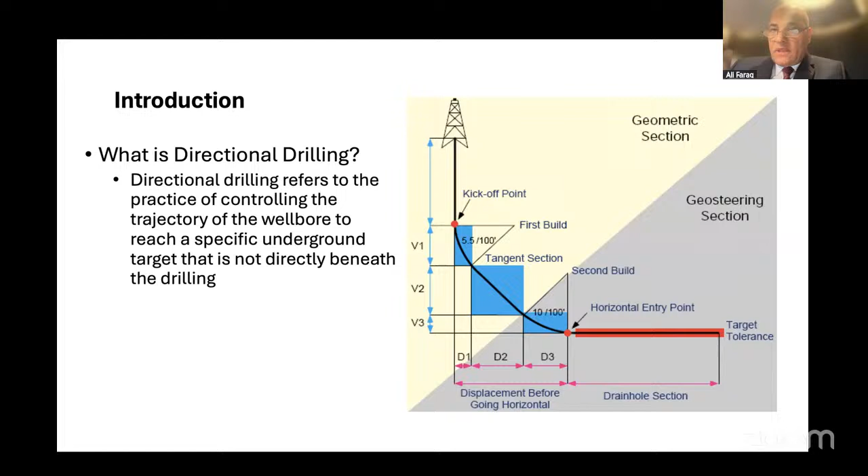If you look at that small schematic, we have the rig. I need to run... Okay, what we have here, we have the rig and then the kickoff point. At the kickoff point, we're supposed to deviate the well. As we deviate the well, we build the inclination at 5.5 degrees per 100 foot. The idea itself... okay, what doesn't work. Give me a second to use my pen.

What we have here is the kickoff point. That point depends on the radius. All the curve sections mainly depend on the radius of curvature. So if we have a circle, in the circle we have a radius, and within that radius we have an arc, and we have theta. So the arc equals theta multiplied by the radius.

So that value is in radians. But on the rig side, we use inclination or angle, not radians, because the driller will not understand that. So what we do is take 180 divided by pi, which is 3.14, and this will give us almost something like 57.29.

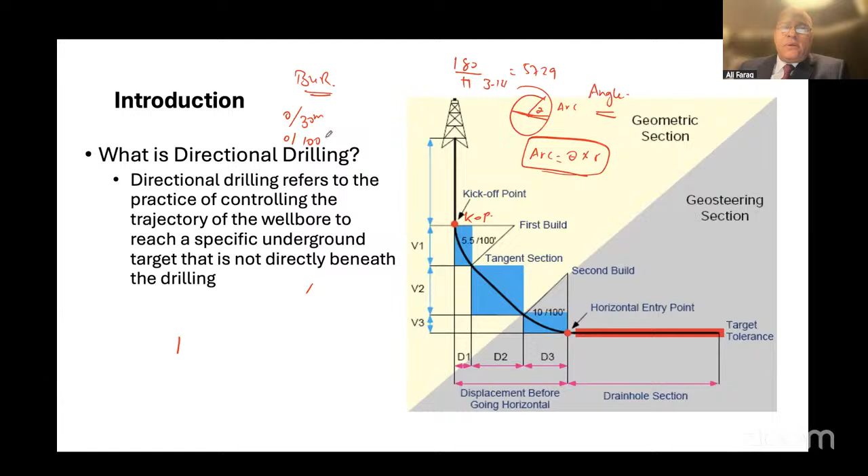So the build-up rate is supposed to be either degree per 30 meters or degree per 100 feet. So if we set the build-up rate equal to that number, 57.29 multiplied by 100 feet, it will give that number divided by R. Sometimes your client gives you the build-up rate and asks you to build the trajectory based on it, whether it's 3 degrees, 2 degrees, or 2.5 degrees per 100 feet. So we use that to get a radius of curvature.

So if we have this as the radius of curvature, we build the angle doing a curve section, and then we do the tangent based on the build-up rate we got from our client. To build that trajectory, first you need the first build-up rate, then the tangent from that point to this point - that's the tangent - and then the second build-up rate, which is 10 degrees per 100 feet. We'll come back to building the trajectory in detail later in our course.

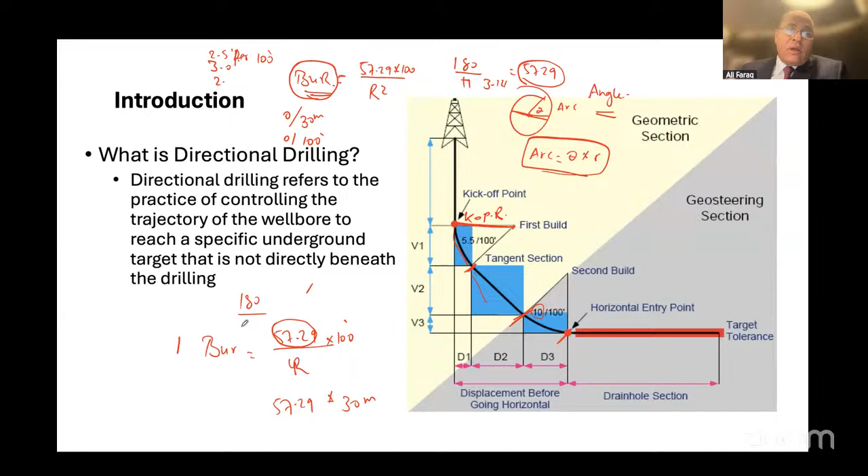But right now you're supposed to know what the build-up rate is. The build-up rate equals 5729 divided by the radius, multiplied by 100 if using feet. If you're using meters, that number 5729 is multiplied by 30 meters - that's the build-up rate per 30 meters. Where did that number come from? That's the conversion from radian to inclination or angle, which is 180 divided by pi. That's as simple as that.

Objectives of directional drilling - why we are doing directional drilling. First, sidetracking. What sidetracking is: we are building the well while we are drilling. We get an obstruction, we get stuck pipe, whatever we get, and then when pulling out of hole you cannot go further. So you do a fishing, then put cement and do a sidetrack. So you get a deviation from the original hole, which is a vertical well, to a deviated hole, and then you can come back again to your target. This is number one of the objectives for directional drilling.

Number two, why we do directional drilling: we are controlling the fault. Why are we controlling the fault? If you have a fault like that, we know that if you drill straight through the fault zone, you will get a lot of trouble due to losses and stress in that area. Then you will lose mud or get stuck.

So for that reason, we sometimes drill just crossing the fault using directional drilling. This is number two. Number three, inaccessible area. If you have a village, you cannot destroy the village to drill for that target. You stay here and do directional drilling instead. This is the inaccessible area case - or if you have rivers, mountains, or similar natural obstacles, where you can't access the target straight from top to bottom, you do directional drilling.

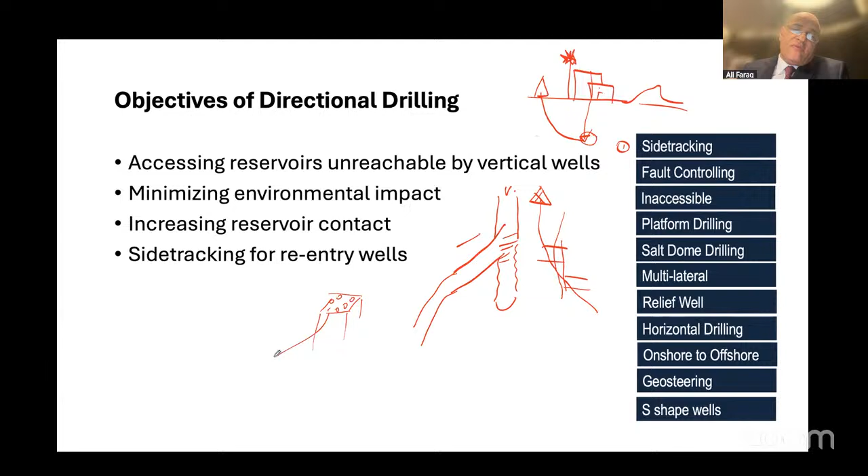Platform drilling - in offshore drilling, we have only one platform with many slots, and based on those slots you go for the first well, second well, third well. That's one platform - that's what we call platform drilling offshore.

Salt dome deformation, or salt dome drilling. The salt comes up and forms a diapir like that. When the salt comes and forms a diapir like that, we have three stress regimes. The first one is strike-slip. From that, we have reverse fault here, and normal fault there.

Due to changes between sigma 1, sigma 2, and sigma 3 - which is sigma V and sigma H capital or sigma H small, or principal stresses - you cannot drill straightforward easily in that stress area. Or if you go through the salt, it contains a lot of temperature.

So what we did is stay here and drill from far away as directional drilling. So for a multilateral well, we stay there and have one target, and we drill the target like that. And if we have another target, we make a fishbone well, which goes from here to there and from here to there.

I will take a moment to explain what the relief well is.

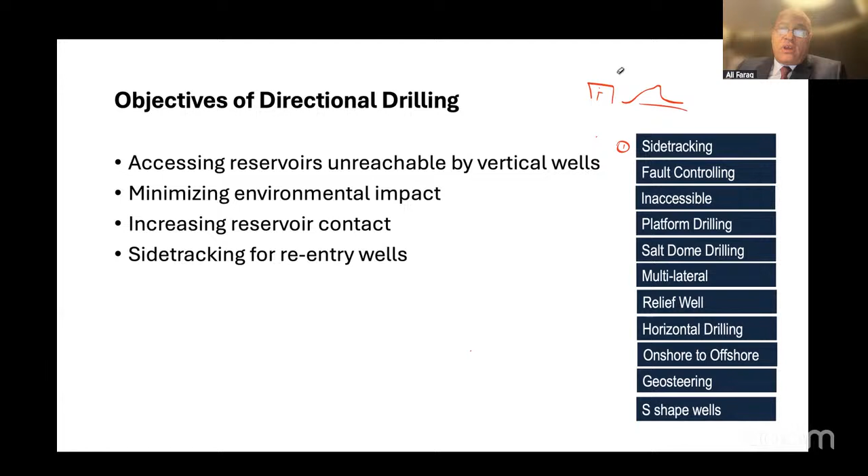If we have a catastrophic problem, like what happened in Syria long before, in 1998, there was a blowout, and a lot of hydrocarbon came to the surface, and they could not control the well. The well started burning, so what we do is something we call a relief well.

We stay far away from this location and drill a well to kill what we need to kill. We have a reservoir at that point, and a well that caught fire due to the catastrophe. So we stay at that point and do a relief well - maybe more than one, 2 or 3 - to kill the well and control it. That's why we call it a relief well.

For horizontal drilling, if you have a thin bed, you can go for horizontal drilling easily in each direction.

Onshore and offshore drilling - sometimes, like in Egypt or Aberdeen, there is an island very close to the shoreline. We put an island, we put a land rig here, and we can drill inside the sea, inside the ocean, or inside onshore or offshore areas. Why? Because a land rig is very cheap compared to an offshore rig.

For geosteering, sometimes we have a very thin bed, so we go as far as we can using a geosteering technique.

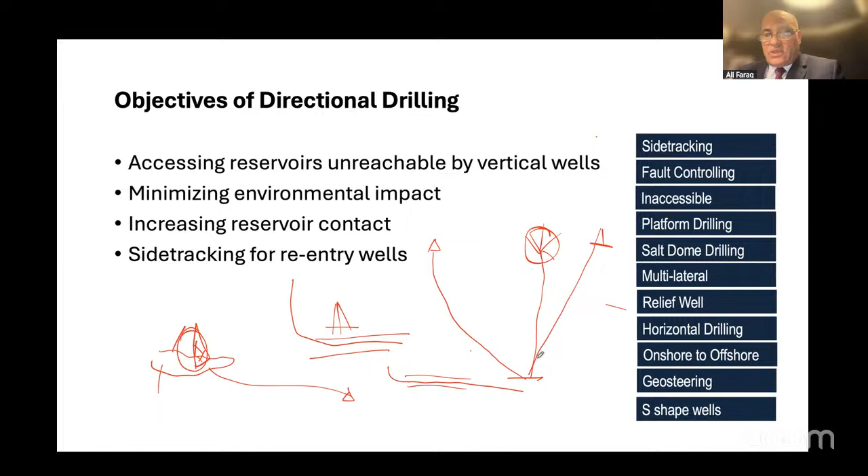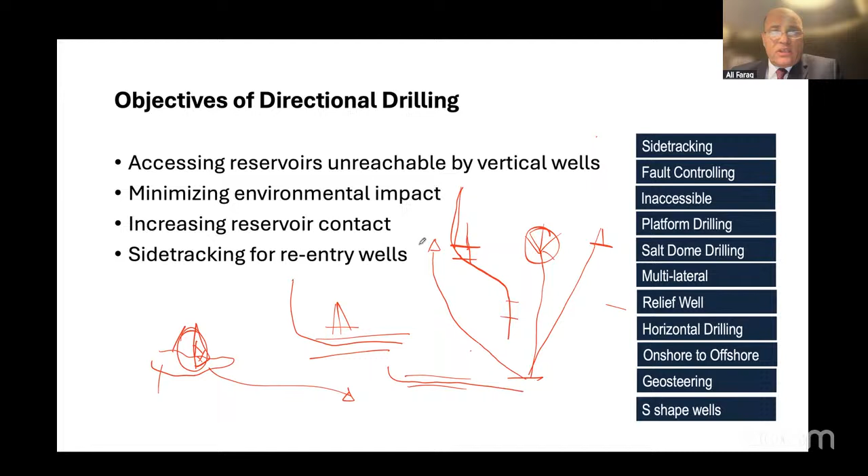An S-shape well is used if we have 2 wells, or sorry, 2 targets. We build inclination, come from here to there, build inclination, hold inclination, and then drop - that's what we call S-shape drilling. So there are really a lot of objectives related to directional drilling.

Directional drilling started in the 1930s. The first attempts were done because they needed sidetracking, and after that to control the lease - we're drilling at that point and cannot go out from the boundary of our lease. So they did directional drilling to correct the well, as a correction run.

They used an acid bottle as a surveying method. This was a very basic tool - we have acid in a bottle like that and drop it in the well. When you drop it in the well, the acid takes the verticality, so we can know what the inclination of the well is.

From 1970 to '78 arose the measurement while drilling tool, MWD - that's almost 50 years ago. Before that, we used a single shot, using a Totco ring or Totco on acid bottles.

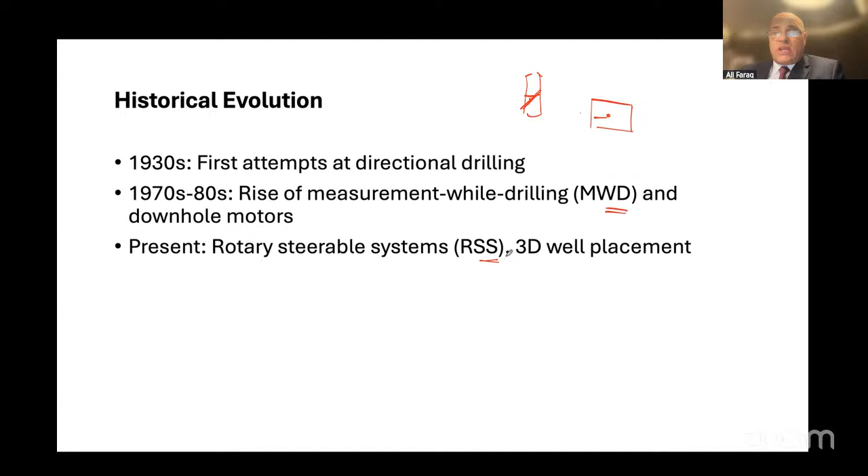Present day, we have RSS, rotary steerable system, to do 3D well placement. That's mostly replacing the motor in most cases, and it helps us avoid key seats and high dog leg and tortuosity. Tortuosity is the summation of dog leg from 0 to TD - that's what we call unwanted dog leg. So the RSS helps us control the dog leg and tortuosity.

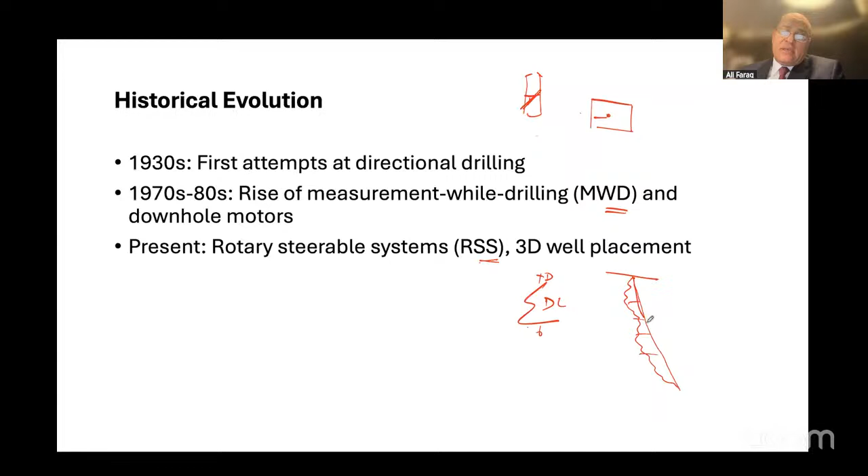How does this come about? If we do a summation for dog leg like that, and we have a calculated or actual dog leg coming like that, that's an unwanted dog leg - we don't need this unwanted dog leg. The rotary steerable system helps us achieve a very smooth wellbore trajectory.

Types of directional drilling - we have 3 types, by the way, and I would like to mention them. The first one we call J-shape. I will come back to that one based on the radius of curvature. And we have S-shape, and we have double build, which is horizontal.

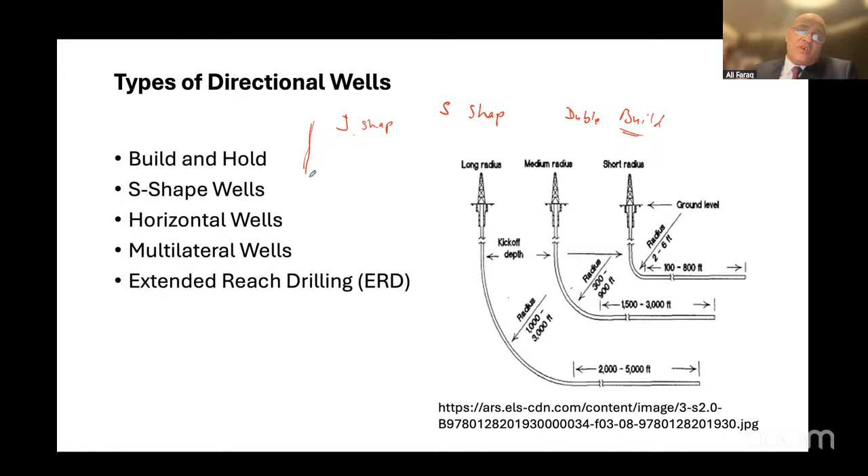We have 2 types of J-shape. Why? Because there is a relationship between the radius of curvature and the target distance. When the radius, which is R, is bigger than the target distance, this is one type, and when R is less than the target distance, this is another type - 2 types. How does this come about?

If you have a rig here, a kickoff point, your radius, then go down to TD, and you have a target distance - this is part of the angle, and this is your curve, and this is your tangent. This is the shape of the well - that's what we call J-shape.

The other one is when the radius itself is bigger than the distance, so the radius of curvature is very, very big. Let me erase this to keep it clean for you guys. Okay, here we are.

When the radius from the kickoff point is bigger than the distance, that one is very big, so I will do the tangent. So it will be: kickoff point, curve section, and then tangent. That one's build-up rate is very, very small.

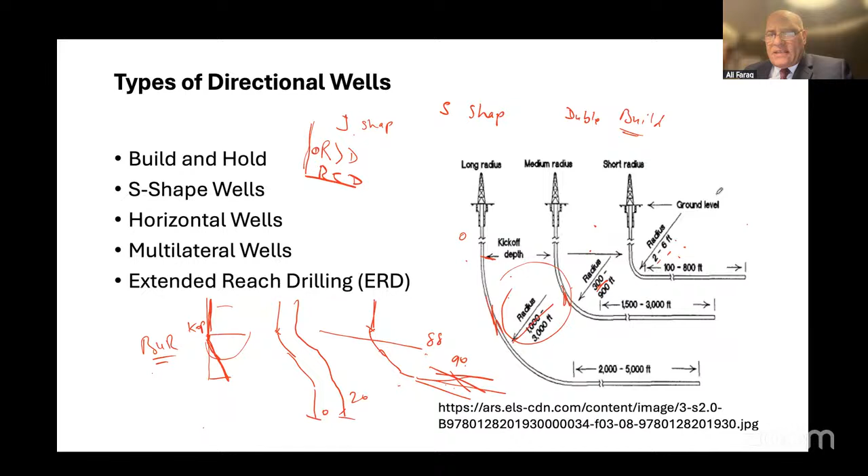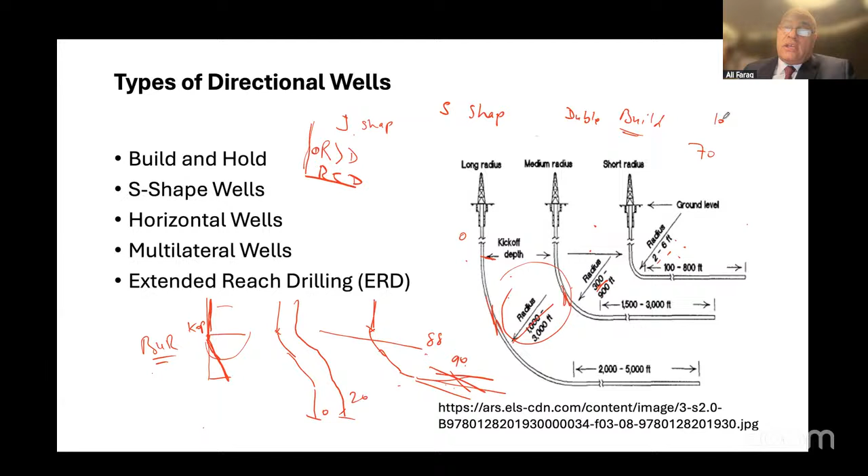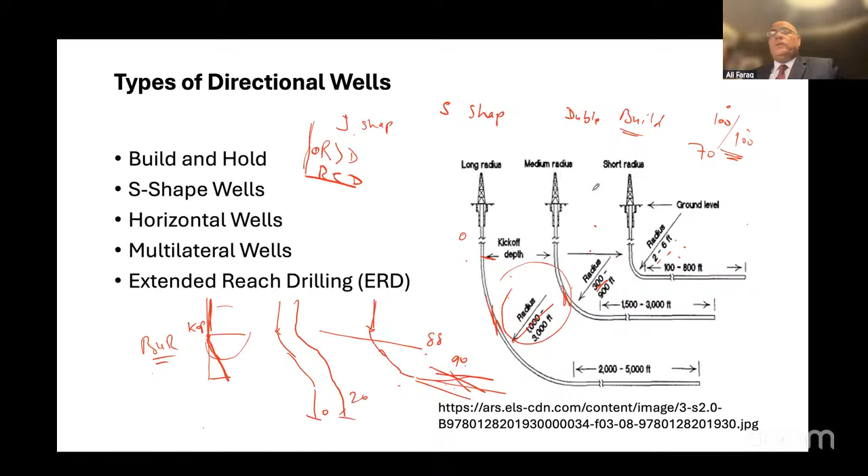When the radius is more than 1,000, we call it long radius. When the radius is 300 feet, we call it medium radius. When it's from 2 to 6 feet, we call it a short radius well. And there's some ultra short radius well when the inclination comes to 70 or 75, or sometimes 100 degrees per 100 foot. I drilled one well like that in Qatar - it's a very ultra short radius well.

I did all the directional work in a few hours in one drill. So what I'd like for planning is, if you already have a trajectory and you decided your trajectory is short, long, or medium radius based on the build-up rate.

Okay, then what is the target? We have three targets based on the person. The original geological target is very big, as you see the green one. We do some uncertainty reduction for geo uncertainty, based on the geologist. Then we reduce it further for drilling uncertainty, to keep yourself in that red area - we call that the drilling uncertainty.

So for the drilling uncertainty, you need to build your well plan based on subsurface and surface location, subsurface location coordinates X and Y, true vertical depth, measured depth, and then after that you need to build your trajectory - build hold, build drop, J shape, S shape, and so on.

And then you need to think about anti-collision. What is anti-collision? The distance between one well and another well, because you are traveling inside the earth. If you come very close to that well, you can collide with it, and if that well is producing, you will have a lot of issues, a lot of problems.

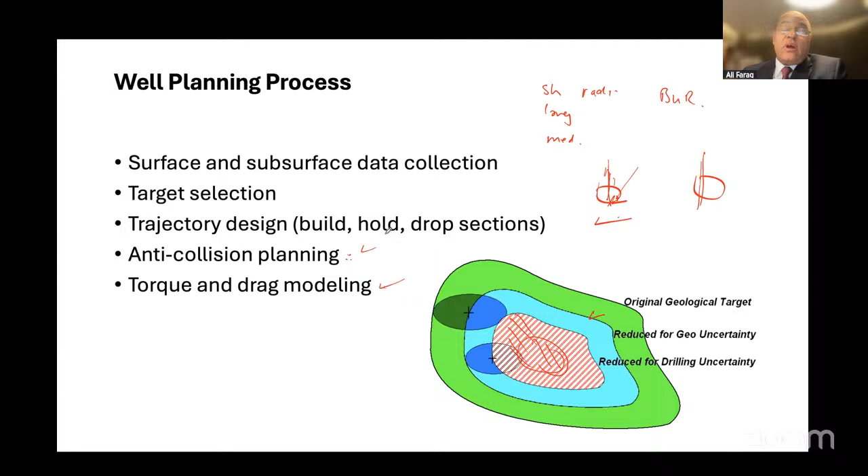So what I'd like to give you today is an idea about directional drilling surveying tool methods. We have three types of survey. Magnetic single shot, that's starting from the beginning - it's a kind of disc, and that disc you have a bin, and this bin you drop inside the hole. It gives you exactly the inclination and direction based on that.

And then we have gyro. Gyro is important for us to build the traveling cylinder in anti-collision, because we have very good confidence - a confidence level in gyro more than the other tools. Why is that? Because the gyro itself is not affected by magnetic interference, which comes either from the drill string or from the surrounding area. So we consider gyro a definitive survey.

What the definitive survey is, the trustable survey. We have a survey from MWD, LWD, or magnetic single shot. We'll take a gyro to build our traveling cylinder around the well to avoid any collision, or for close approach purpose.

The measurement while drilling, MWD, is very, very recent. It's coming from 1985, or around 1985. It has three sensors, magnetometer and accelerometer.

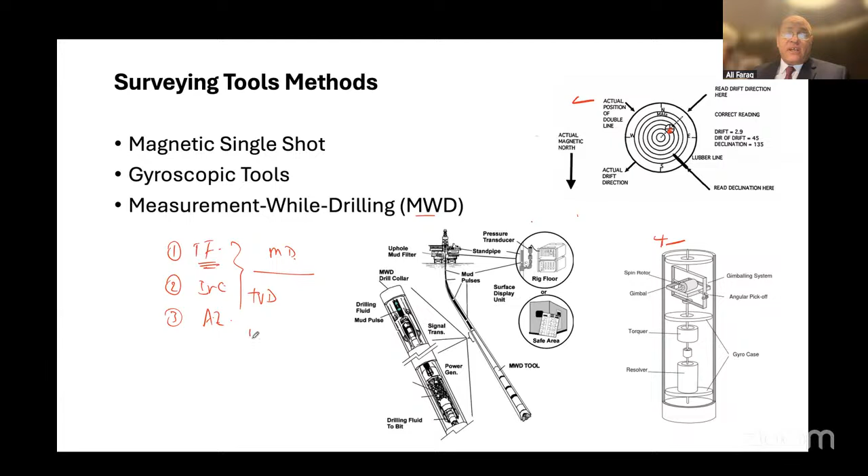What the vertical section is, we calculate next time, inshallah, when we have north, south, east, west, and this is my plan. So the vertical section is the projection from the last survey and plan of proposal. That's your target, this is my plan of proposal direction.

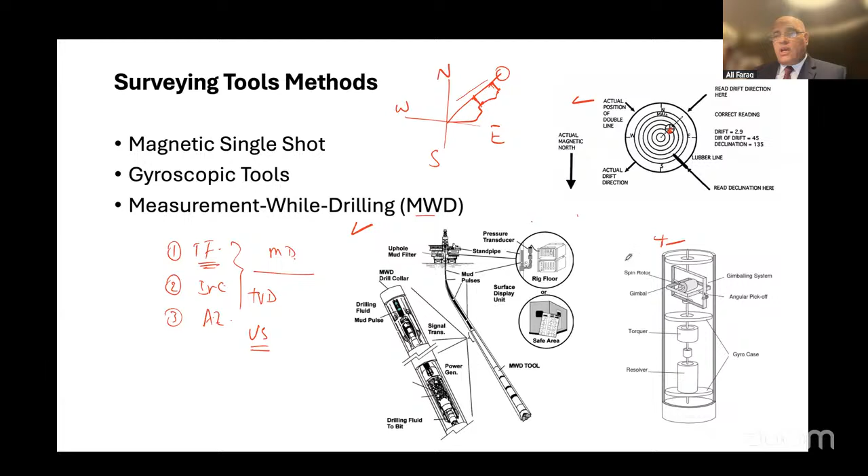Each time you get a survey, you do projection, what we call vertical section. Based on what? Based on the MWD measurement. And we correct if we have two surveys, one coming from MWD, the other from gyro, I will accept gyro, because there is no magnetic interference.

Survey calculation terminology: inclination angles, which come from the vertical. Azimuth, we know the azimuth, that's one the maximum from 0 to 90, that's one from 0 to 360. And true vertical depths, if you take it from sine cosine rule, this is true vertical depths, and that's one is measured depths. The true vertical depths depend on the datum itself.

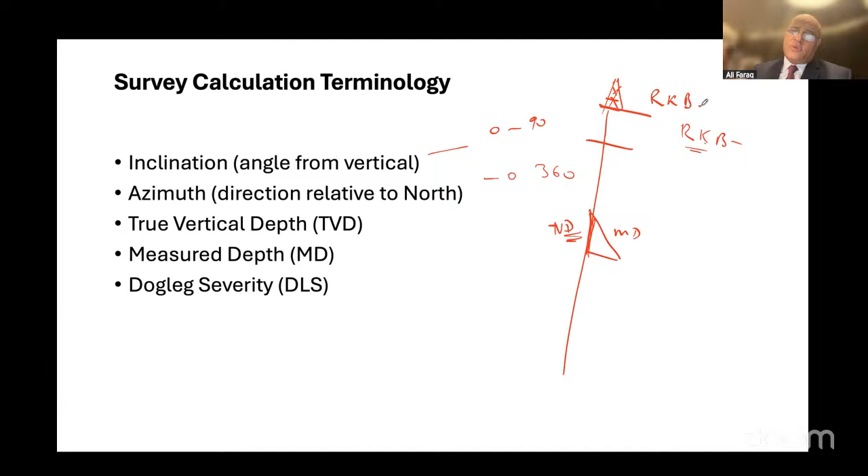We have three datums we use in the oil field. The first one we call RKB, rotary Kelly bushing, that's for the driller. If you have the rig like that, this is the rig, that's one, RKB or Kelly bushing based on. That one is wellhead from the ground level, that's one for production engineer.

And then you have mean sea level, that means sea level. In sea level, this is one for seismologists or geophysicists, and using for geologists. For that reason, sometimes you have TVD subsea, and almost it's coming by negative. So that's the reference we have.

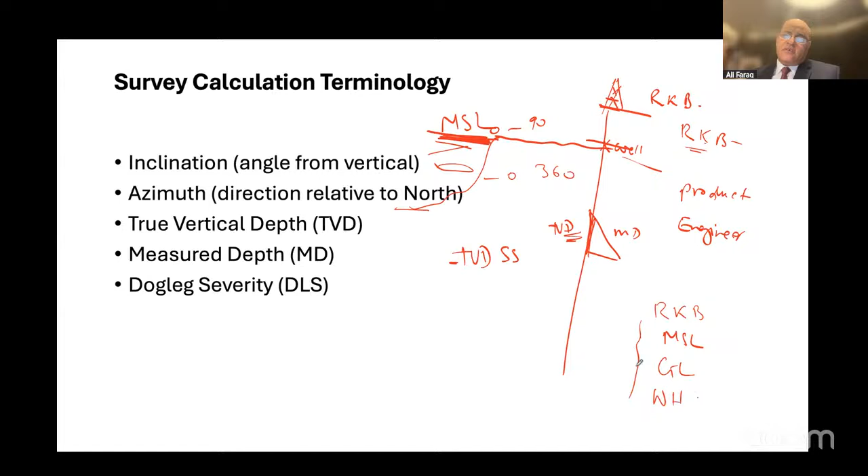How many references do we have? We have RKB again, we have mean sea level, we have ground level, which is very close, and we have a wellhead. This is four references we use in the oil field.

Wellbore departure methods: earlier we used the jetting method. Before we got the motor, before RSS, we're using jetting in very soft formation.

As you have here, we have bits. In the bit, we close all the jets and keep only one jet, and we do a scribe line and start jetting in one direction, and that's doing kickoff, as you see here. That's one we did at the surface whenever we have a very soft formation like shale.

We have a whipstock as well. Whipstock, that's a pin, we shear the pin, and we have milling assembly as you see. When we have the casing, we need to mill the casing to open a window. We put the whipstock, and then start milling the casing to make a window inside the casing, and then we go out like that. That's whipstock.

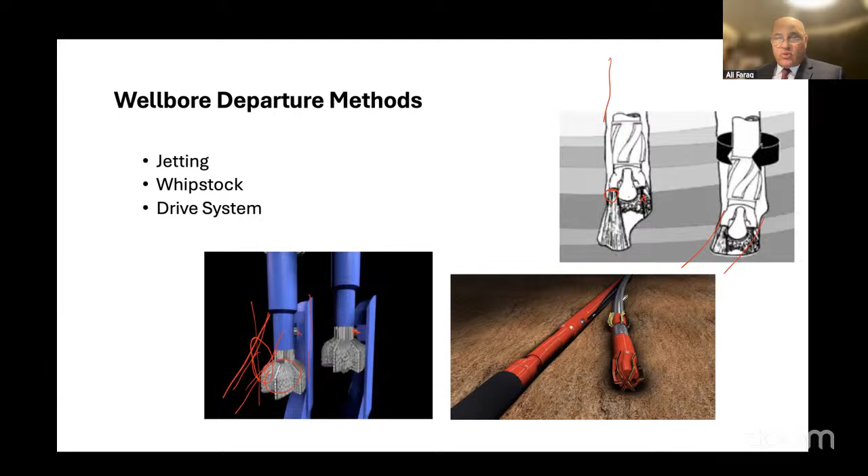It could be in the casing or could be inside the formations, and that's the technique. It's really a good technique to do a sidetrack, saving a lot of time instead of doing a time drill. Sometimes we're doing a time drill.

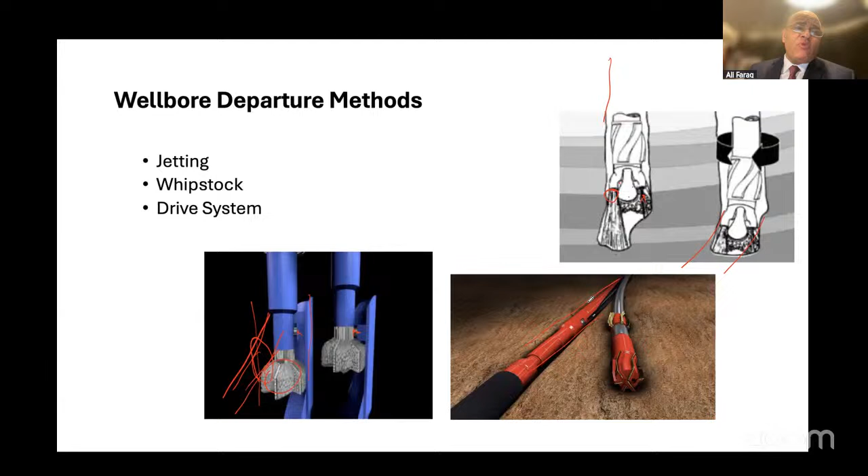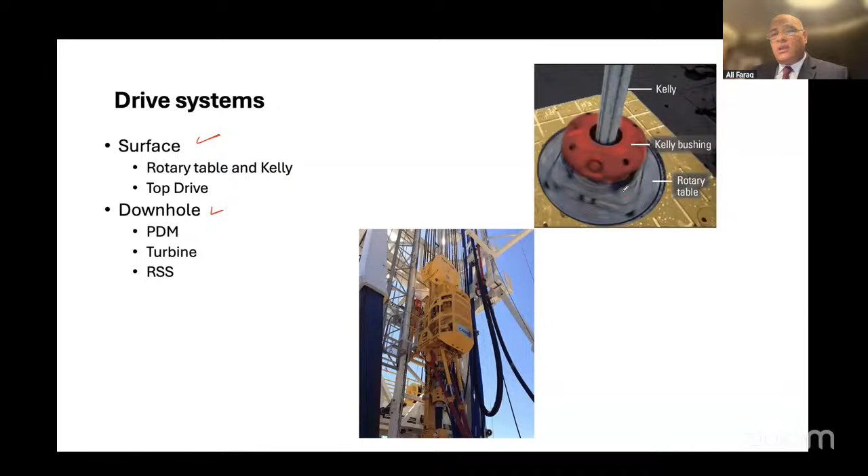Drive systems to do wellbore departures. Let's go for it. We have two drive systems, one on the surface, another one downhole. On the surface we have Kelly bushing, rotary table, and Kelly, and nobody uses that one so far, because it's not saving time. Everybody's going for

top drive. Why top drive? Top drive uses a stand. What is a stand? Three pipes together, we call it a stand.

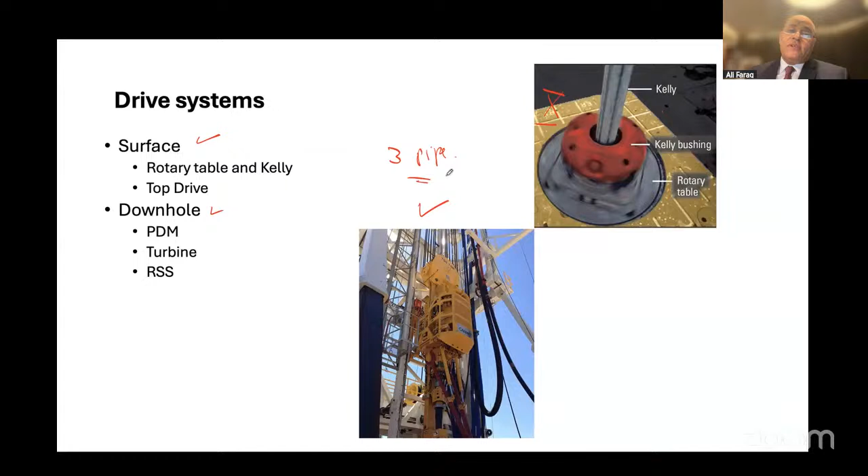You drill by stand, or drill single by single, pipe by pipe, which is 9 meters plus or minus. That's one. The other is 30 meters plus or minus. So that's what we have.

Also the benefit of the top drive is doing a back reaming. We cannot do back reaming with the Kelly. We can do that if we have difficulty drilling or getting out from the hole, we can use that top drive. So downhole we have PDM.

What is the PDM? Positive displacement motor. What is the positive displacement motor? That one transfers the hydraulic power to mechanical power, and then we use the motor to do slide and rotate. When we're doing slide and rotate, we are building our trajectory according to the plan.

Turbine is the same, but the turbine has no adjustable bend, there is a fixed bend. You can put the bent housing, fixed bend at 0.5, 1.5, and so on. But the PDM is an adjustable motor. There is a different technique between both of them. We have a rotor and stator and power section, what we call the power section in the PDM.

That one has some stages, like the turbine stage. And then the RSS came. We have two types of RSS: the first one is the pushing system, the other one is the pointing system. Everybody is using the RSS right now, in addition to the motorized RSS, and that's really a very big issue.

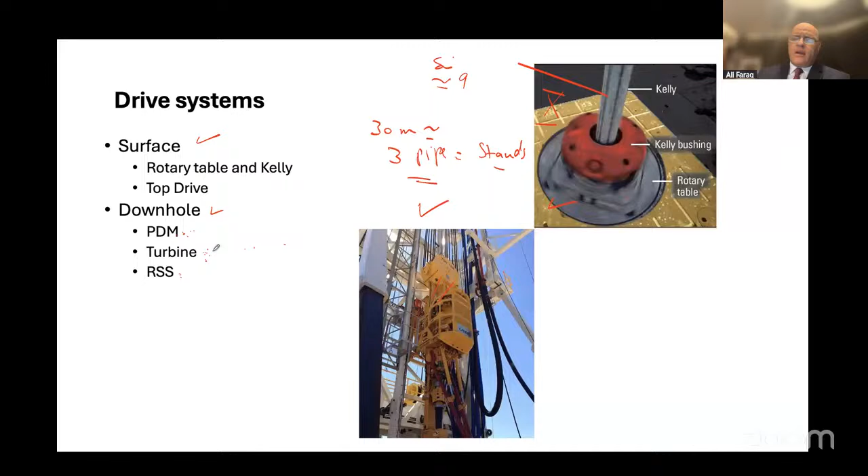This is very, very fast, but the output torque is exactly like the gearbox of a car. When you have the gearbox of a car, the big one, the first gear, gives very high output torque but at the same time very low speed. So this is one configuration.

PDC bits need more torque, more output torque rather than RPM. But a Tricone bit needs more RPM rather than output torque. So if I have a Tricone bit, I need to select the configuration of this motor to be 1, 2, or 3, 4.

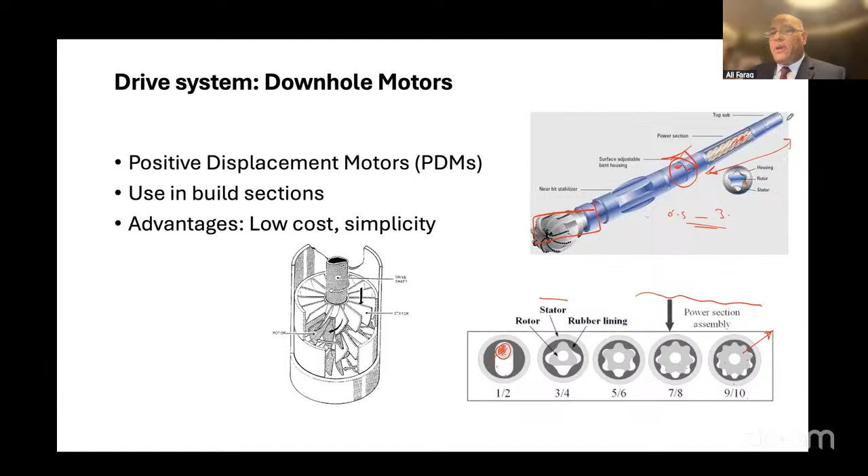So that's the rotating box, only that part will rotate when you're pumping drilling fluid from here. The rotor will transmit the hydraulic power to mechanical power through the mechanical assembly, or drive shaft, and then it goes straight forward to the rotating box. That's why we call it PDM, positive displacement motor.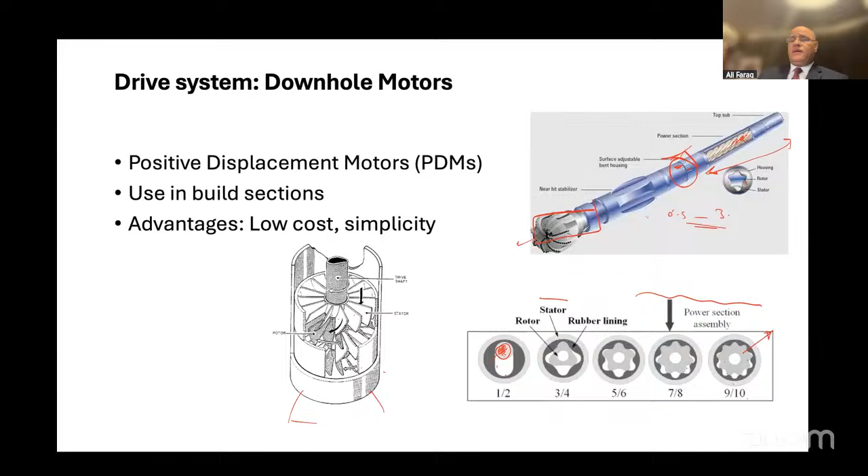The advantage of this one is low cost and it's very simple to build your inclinations. So we also have turbine. This is the turbine, with stages, and as you pump the fluid, those stages convert the hydraulic power to mechanical power, with the bit here. The only thing about the turbine is it gives very high RPM, but it doesn't have an adjustable bent housing, so you can only use fixed bent housings like 0.5, 3, and so on.

Then the rotary steerable assembly came, and we have two types. The first one is the pushing system, that's used when you are drilling with hydraulics. It consists of 3 parts: the first part is the electronic part, the second is the mechanical part, and then the electronic part, they call it bias in Schlumberger I think, and that's the box.

You are doing a trajectory while rotating because you have a map, and on that map you give the instruction, I need to build inclination while drilling, with a cycle of 5 minutes. So in 5 minutes, you set your tool face.

What is the tool face? The tool face is the direction where you will slide or rotate. So that's 0, 90, 180, and 270. From 0, we have build. If I put the tool face on the map at 0, it will mainly build inclination.

So that's one, turn right. In between that, build and turn right. Build plus turn right - that's one low side, and this is high side. At 90, turn right, and then here drop inclination plus turn right. At 180, completely drop inclination. At that point you can drop plus turn left. What's that one? This is turn left completely, and this is build, and here build and turn left plus turn left.

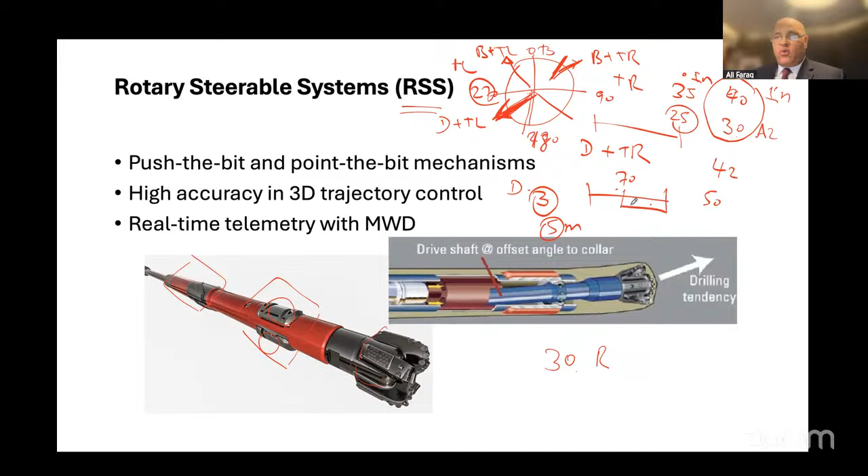That setting depends on the drilling cycle and tool face. What drilling cycle? Some companies set drilling cycle at 3 minutes, some say 5 minutes. I'll set the tool face, say 30 right - that's the tool face, put it at 30 right at that point, and do the drilling cycle as 70%. 70% out of the 3 or 5 minutes the well is doing sliding, and the other 30% in neutral mode. Otherwise, if you keep it at 5 minutes as the setting, it will cause a very high dog leg - if your required build up rate is 3 degrees, you may get 4.5 degrees, which is too much while sliding.

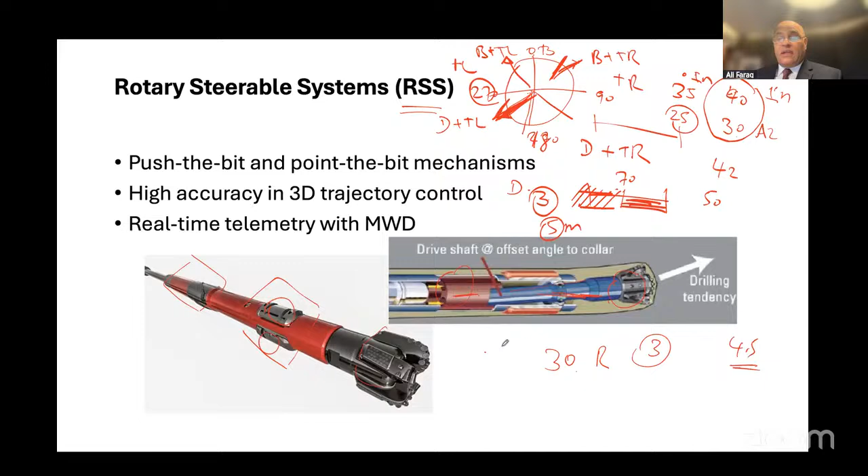So that's one, the pushing system, but that guy is pointing - meaning you have an offset between the main body and the axis of that tool. This part rotates with a different RPM, causing bending, like a pointing system, exactly as we did in directional drilling by using a motor with sliding and rotating moves. After that, sometimes the company man says, no, I will not use directional drilling, I will correct my well by using a BHA. What is BHA? BHA, bottom hole assembly.

So he can build a pendulum assembly like that. He puts something like 30 or 90 feet with no contact point except the bit, and puts two stabilizers. That does a pendulum effect. The pendulum effect is a negative force - it tends to go with gravity, and if the inclination is at 3 degrees, this assembly will drop the inclination using RPM and weight on bit. That's why sometimes they add weight on bit or reduce weight on bit just to control the wellbore trajectory. We call this the pendulum effect.

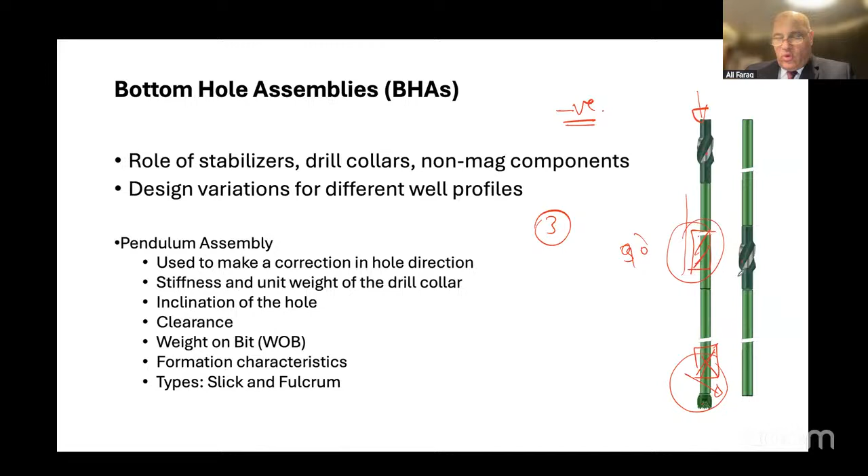There is something called the fulcrum effect. If I add a stabilizer at that point, and keep another stabilizer at that point, but this one is under gauge and this is full gauge, and add more weight, that assembly will bend. This overcomes gravity and builds inclination. That's why we call it the fulcrum effect. So the pendulum effect depends on the point of tangency.

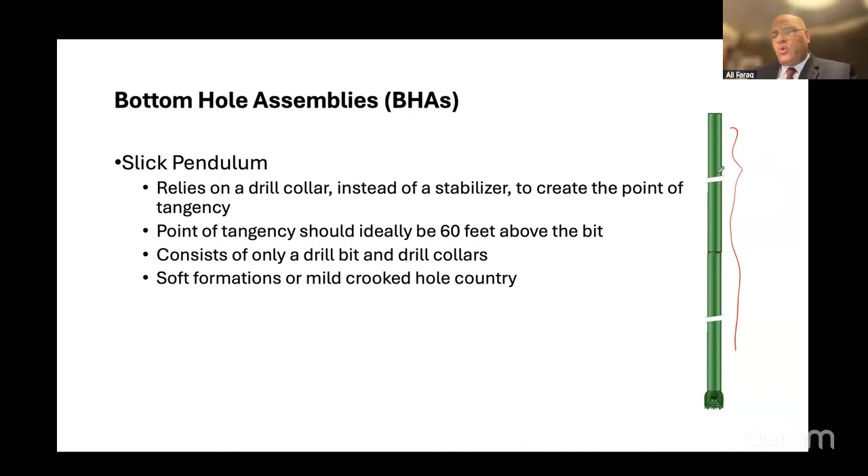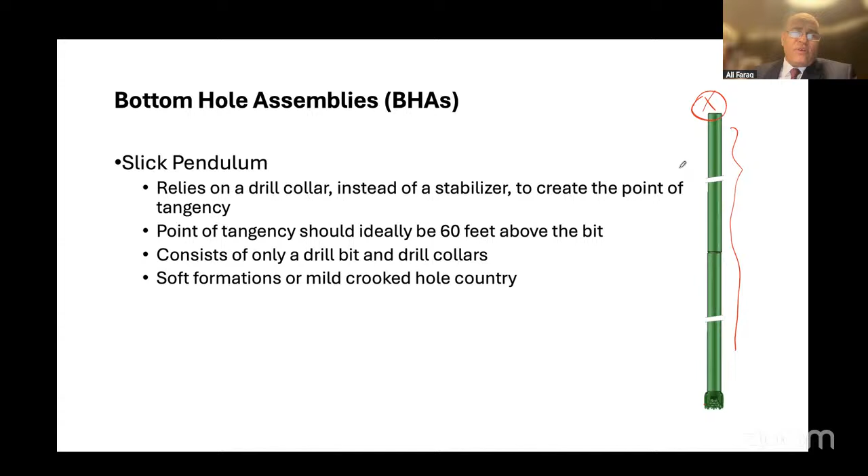It's almost about 90 feet, or 60 feet, or two stands until you get the first contact point - the bit and then the stabilizer after that. That works in a soft formation or crooked hole country. Sometimes you use the fulcrum effect instead - for the pendulum effect the stabilizer is near the top, for the fulcrum effect the stabilizer is closer. The other one is negative, that one is positive - you have a contact point very close to the bit.

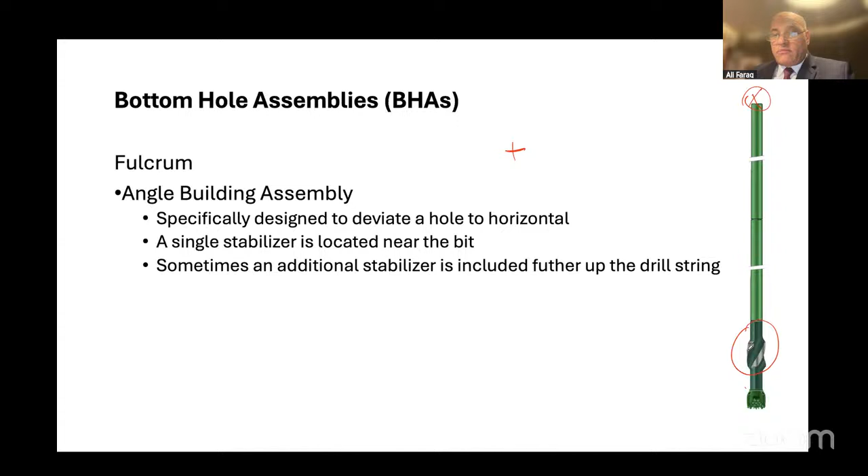So what about the weight on bit? If you add weight on bit here, the BHA will behave like that. If the company man needs to build from 1 to 6 degrees, and he gets 0.5 degree per stand for the whole well, he can do it by BHA, no need to run directional drilling. The BHA contains very precious, very expensive tools like MWD, LWD, and RSS.

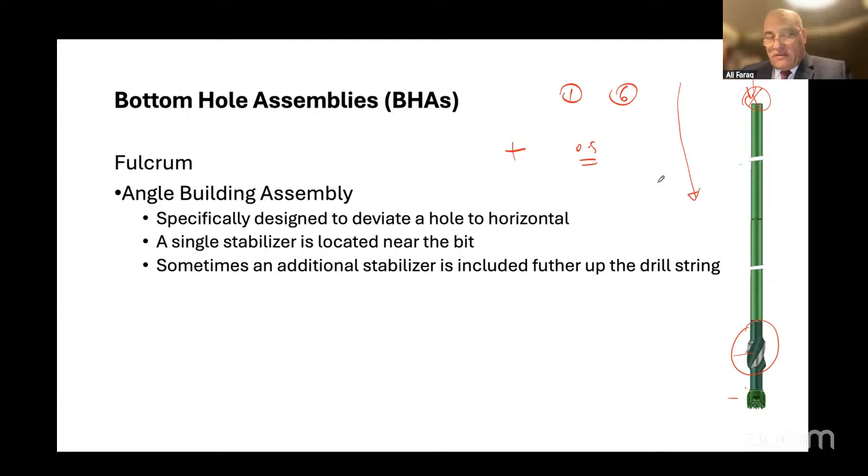So it's based on the fulcrum and pendulum, which is pendulum negative force coming with gravity. The fulcrum is a positive force coming with its building angle. So there is some stuff like what we call it build hole assembly.

A lot of stabilizers. We have a packed hole, we have medium crooked build hole, we have a severe crooked hole, that's to hold inclination. You put more than one stabilizer, especially if the formation tendency is building and you need to control the hole without any directional assembly.

You run more than a stabilizer. That's one stabilizer, two stabilizer. If you take this guy and put it here, it's three stabilizers, what we call it build assembly. This one, and this one stabilizer, two, three, and you have a bit and put it here. This is almost five, one two three four.

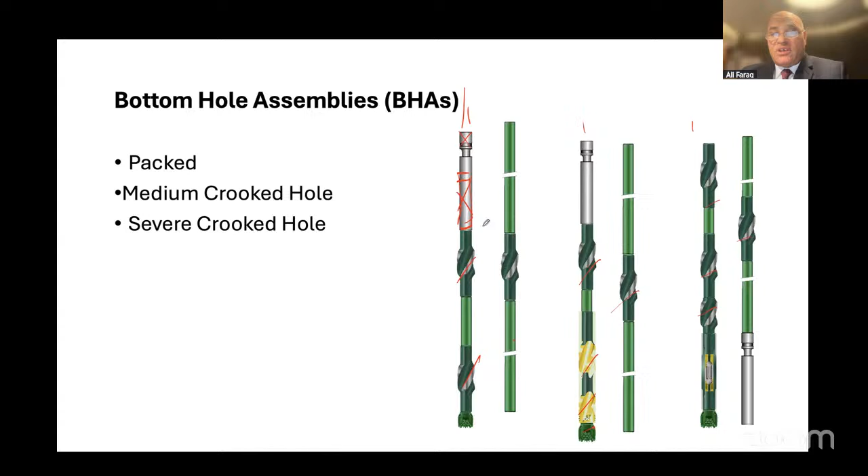That's one severe. Sometimes we do it back to back stabilizer. We got this stabilizer, put it exactly like that. At that point we call it packed assembly. Why that? Because the tendency of the formation is a building formation, we need to avoid that. When we need to avoid that, to avoid doing extra work while we're drilling.

Hydraulic and directional drilling, you need to understand the optimal importance of the hydraulics. It's coming from optimal flow rate. What's the flow rate for hole cleaning? You need to manage the pressure loss to avoid excess pressure, then you can damage downhole tools.

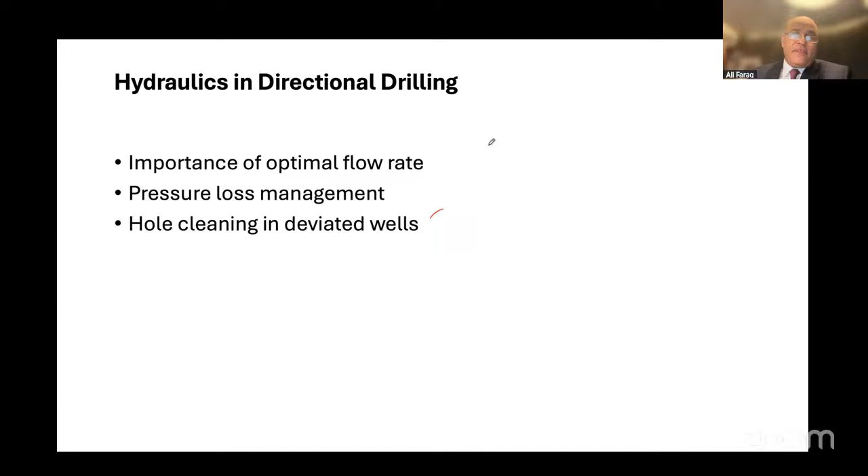In addition to pump or rig pump. At the same time, hole cleaning - I will not go for that here because that depends on the well trajectory, depends on the wellbore geometry, depends on the BHA, depends on the pressure drop through the bit, depends on the liner of the mud, depends on the rheology as well, the mud rheology, which is deformation versus time.

I think that one could take a full day to complete the course of hydraulics. So the pump pressure, it's important to know that the standpipe pressure coming from surface equipment, in addition to drill pipe, mud motor plus MWD plus bit and annulus.

The bit is important. I need more than 250 psi drop at the bit when I'm running the hydraulics calculations. Why that? Because 250 psi, that's what guarantees to return 10 to 20% of drilling fluid for the bearing of the motor, to cool down the motor while running. Otherwise, the bearing will burn out and then you will pull out of hole for no reason except that the motor has failed.

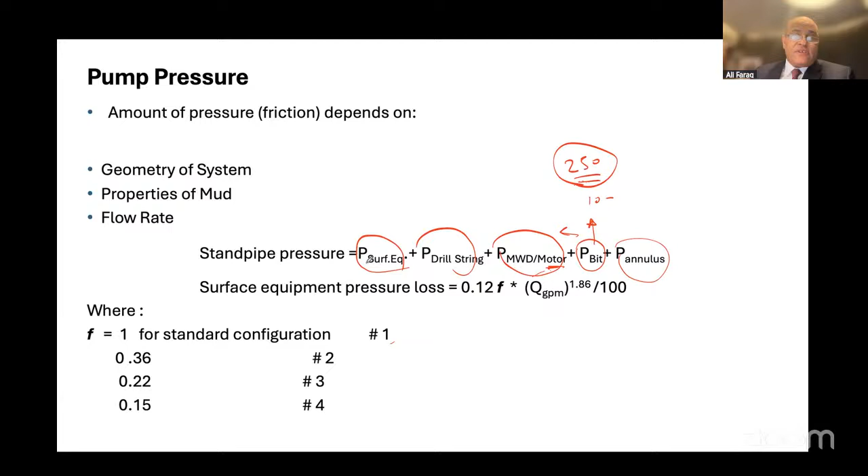So that's one, you need to understand why we're doing bit hydraulics to select the motor itself. Sometimes we have standpipe pressure based on the rig type itself - rig type 1, 2, 3, or 4 - then you can select the surface equipment and put the factor for that to increase accordingly.

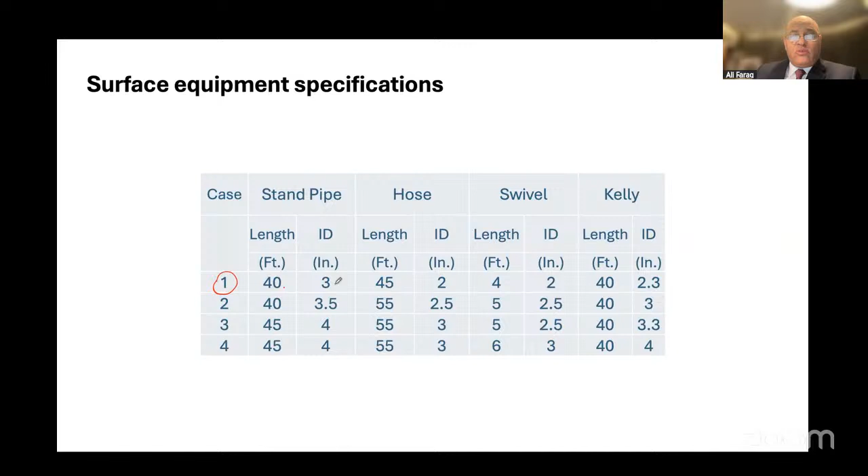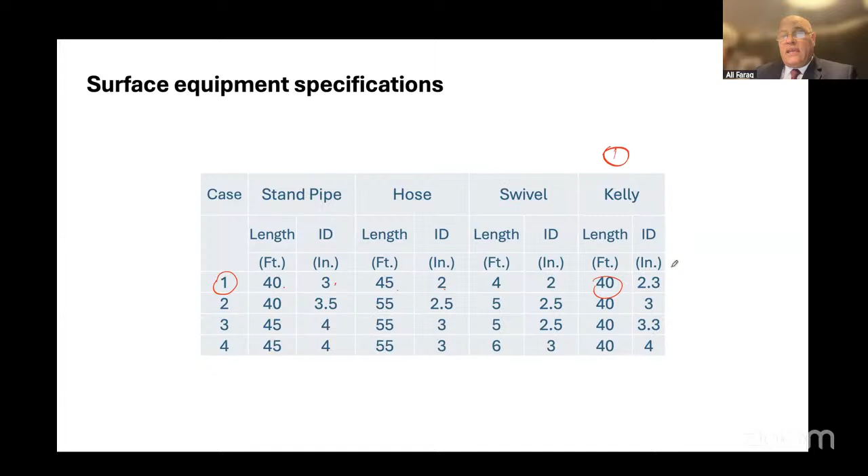Okay, some surface equipment specification cases. Number one, surface, the length of standpipe is 40 feet, inner diameter, length is 45, inner diameter is 2, length, and then you come up to the Kelly length itself. So there's a lot of software - it will ask you for the case, what rig case, what surface equipment specification. You tell it number 1 or number 2 or number 3, it will take all that - swivel, hose, standpipe, Kelly - and then it will give you the pressure made by that configuration.

So anti-collision, important to know what anti-collision is. The anti-collision is the distance, the safe distance between the offset and target well. We have a lot of calculation methods - one of them is what we call 3D closest approach, and we have a traveling cylinder. We use a traveling cylinder when we are nudging because we're doing a drilling tunnel based on the traveling cylinder.

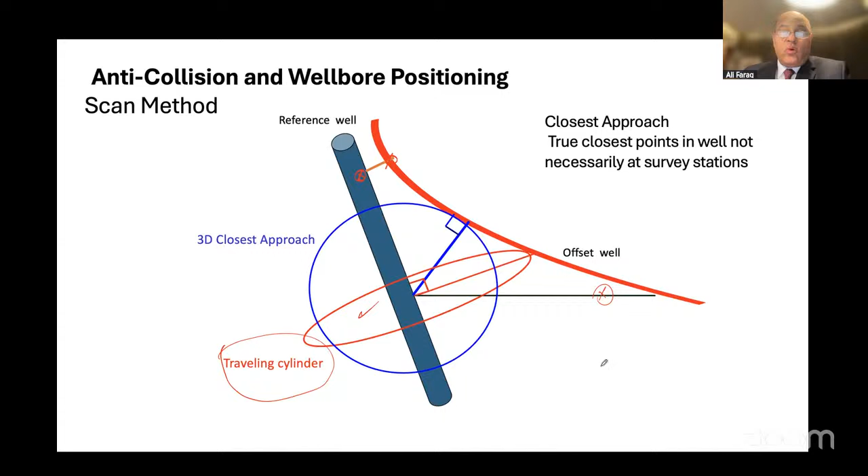We have horizontal - I will not go into that in detail, because it would take time with the course, and I don't want to go through it right now because it's a full day to go through close approach, to understand the distance between wells while drilling, and that's very, very important. All companies right now ask you if you've completed the course of close approach or drilling safe - you need to do that, otherwise you cannot be a directional driller until you understand what close approach or traveling cylinder means, the distance center to center, and so on.

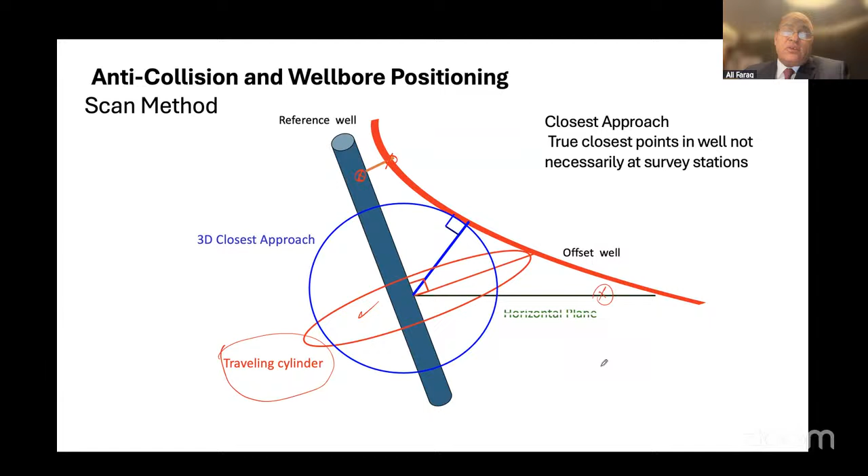So we have some clearance factor based on what? Based on the radius of each well, radius of well 1 and well 2, center to center.

We have separation factor: 1, less than 1, more than 1, you can start drilling. Separation factor equal 1 means the ellipse of uncertainty for well 1 is touching the ellipse of uncertainty of well 2. Separation factor less than 1, you cannot drill at all. You're supposed to stop, raise your hand, and ask for exemption, and then they will give you exemption.

Clearance factor, if it's more than 2, go ahead, you are safe. Less than that, you need to raise your hand and ask your manager or the company to give you exemptions. Otherwise you can hit another well, and if that well is still producing, you will be in a very bad situation.

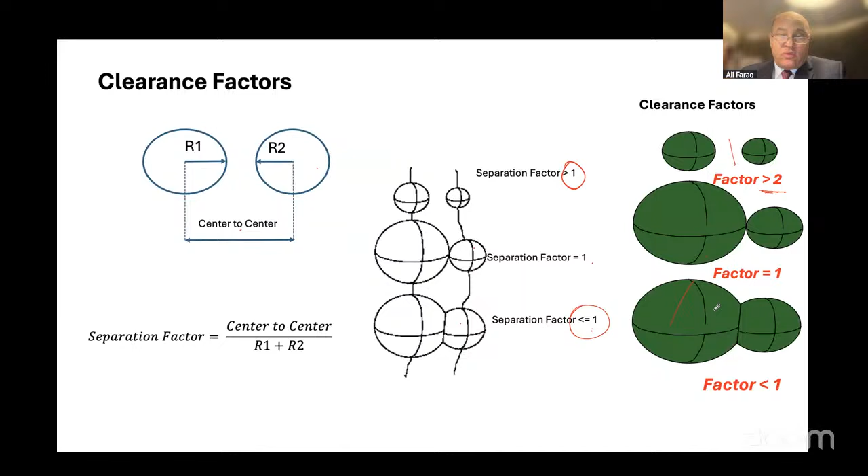So drilling challenges: hole cleaning in high angle. If you have high angle wells, you need to look for a cleaning strategy like tandem pill. What is the tandem pill? High vis, low vis.

What is high vis? High vis gives you what we call laminar flow. Low vis, we call it tandem pill - low viscosity, high viscosity pill. You pump that: the low viscosity will give you a turbulent flow, high viscosity will give you laminar flow. So you are agitating the cuttings bed on the low side of the well, and then the high vis comes and sweeps out all the cuttings out of the hole.

Stuck pipe - we have a lot of stuck pipe scenarios that happen during directional drilling. One of them is the key seat. What the key seat is: when you have a soft-hard formation, one is hard like limestone, and this one is soft like shale.

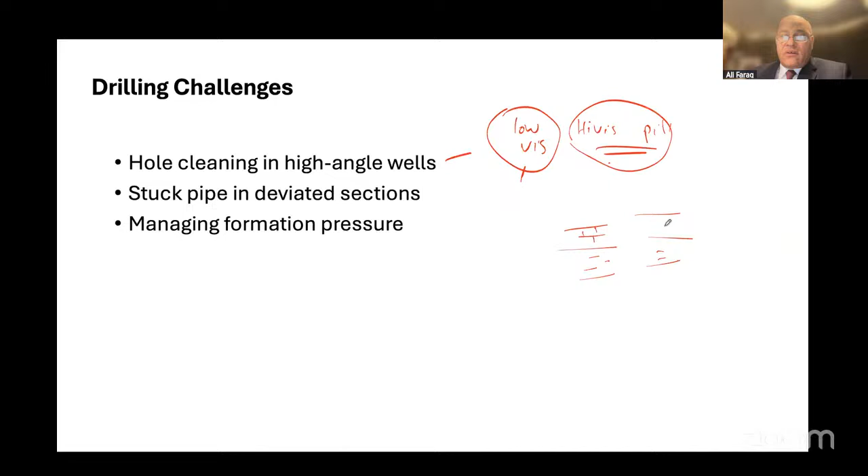And this is your hole, and you have a tool joint. The string tends to pendulum with gravity, so that tool joint will create another hole here. If you got a cross section at that point, it will come in like that. When you pull out of the hole, you can get stuck at that point, so you need to avoid making a key seat. You also need to avoid the dog leg, because the dog leg changes inclination and azimuth. You need to avoid that.

Managing formation pressure as well - formation pressure is a very big topic. If you have equivalent mud weight here, and we have a curve like this one - fracture gradient or fracture pressure, if you wish. You have a pore pressure, that's pore pressure, and you have mud weight. Mud weight is supposed to be here.

And you have what we call the shear failure equivalent mud weight. When the shear failure equivalent is at that region, you are safe. You can drill here underbalanced with no problem, because you have very good cohesion - a very strong rock, very compacted and cohesive. So when that comes between the pore pressure and mud weight window, that's also okay, you can continue like that.

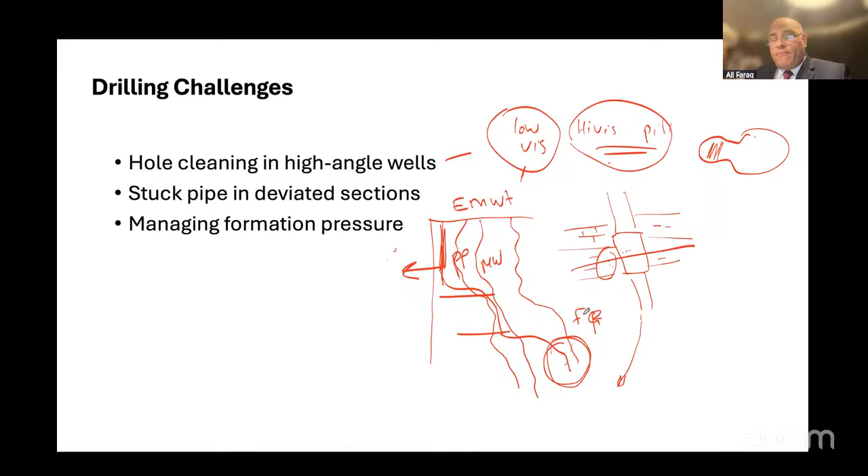But when the shear failure comes close to this point - very close to fracture pressure - then you stop here and ask, guys, please, you need to manage pressure while drilling. We need to manage because the mud weight and fracture gradient are very close to shear failure, so we cannot drill the well like that.

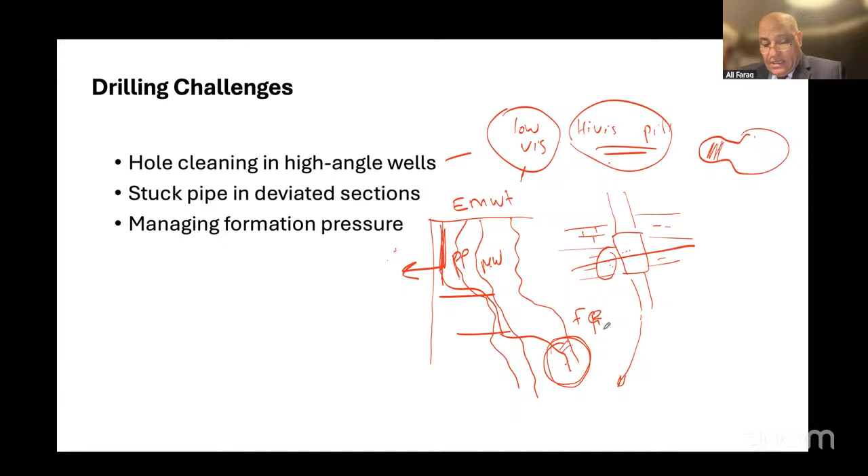So they improved steerability a bit. What is the steerability? Previously we drilled the well in 3 or 4 months. Now we drill the same well in the same area in 20 days, based on the bit technology. Bit technology depends on the cutter size, the type of tungsten material you are using, steerability, whether you can steer or not. Previously we used the bit and looked for long and short gauge to avoid any erratic tool face while steering. Right now the steerability of the bit is very, very good.

Real-time decision support systems - we have a lot of real-time systems, what we call RUC or RTOC or EYES or beacon, a lot of names. Just monitor what we have on the rig side in real time, then we can take the decision immediately and change what we need to change.

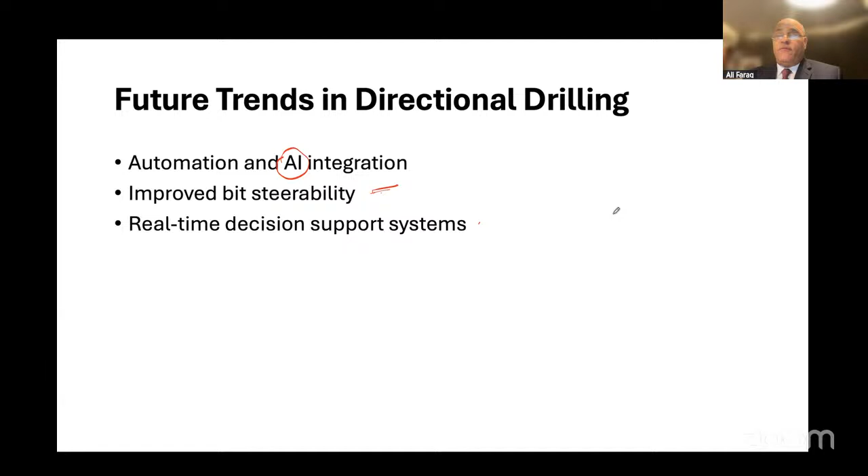That's what I need to tell you guys about the future trends in directional drilling. But still the directional drilling job gives a lot of money for the directional driller. You can make very good money for your future. You can build your career in that field if you still want to be a directional driller.